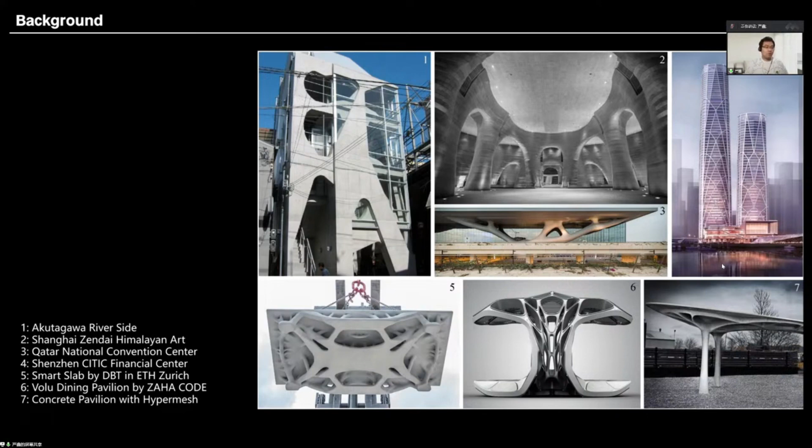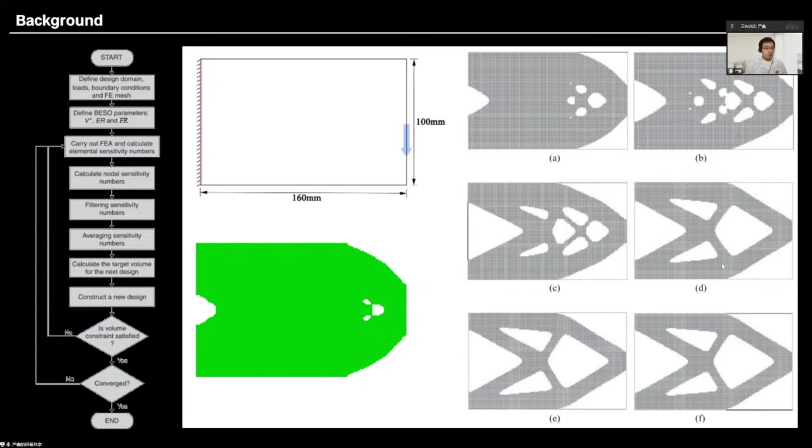But the conventional topology optimization has its own problems. It has limited application conditions in the early stage of architecture concept design, because as designers, when we design our own work, we need to compare our own design objects with the structural performance. This is a very important thing for us, because if we just depend on the computer to tell us which one is good and which one is bad, that's not the work of us.

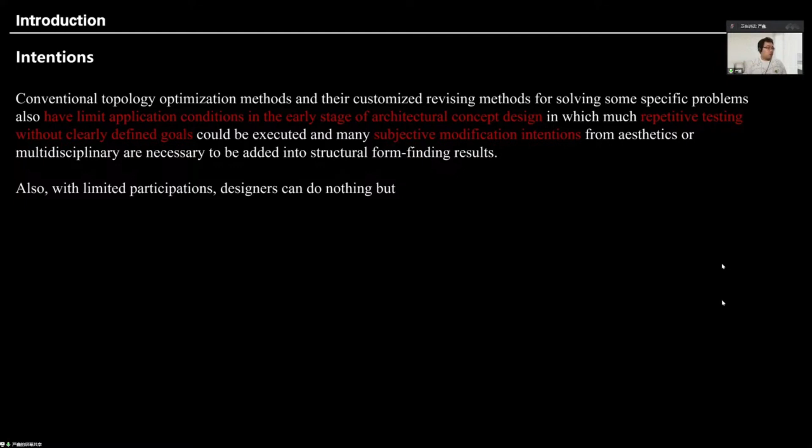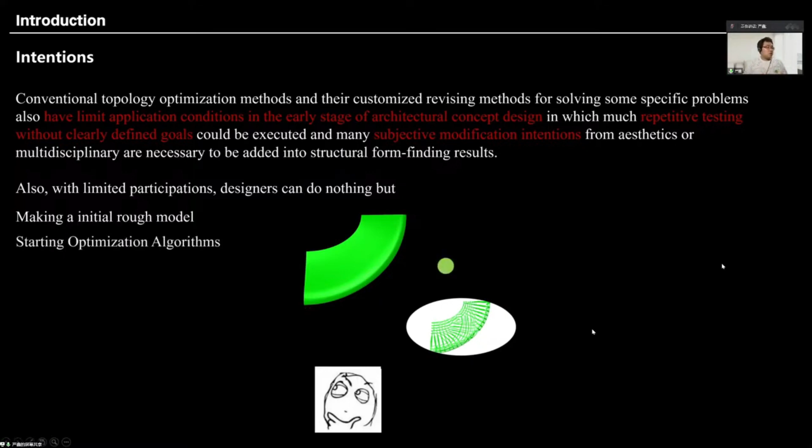So when we use the conventional topology optimization, we usually do something like this: first we make an initial model like the green one, and we imagine what the outcome will be, what the final result will be. We want the final result to be like this, with standard structural components with very small holes over the whole design domain. Then we start the optimization algorithm, and we have nothing to do but wait and wait. Finally, the algorithm finishes its optimization, and we want to get a very good design, but the outcome is like this one.

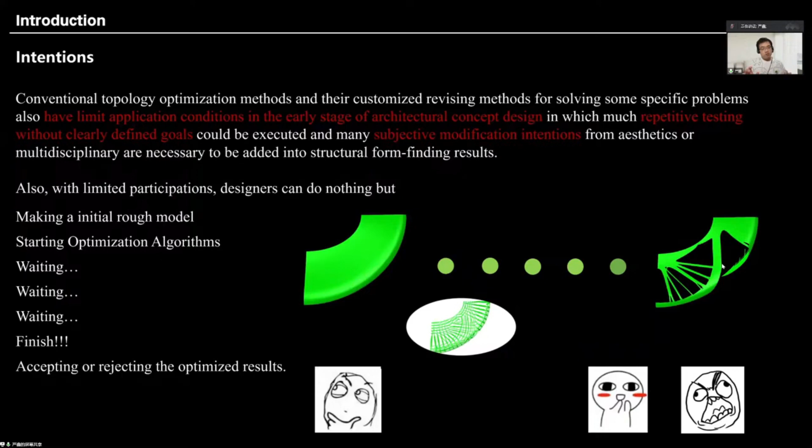We can see the final result the computer gives us is, it's hard to say, the highest structural performance, but it's not what we want. So the question is, can we pre-design the details before optimization, and how to control the design features with topology optimization?

This is the intention of my work, and to achieve these goals, firstly I construct a framework, BESO framework, oriented to architecture design. In the conventional BESO logic, we just write Python code and run it in the Python environment. We have nothing to choose.

In my work I divided the whole logic into several parts. Firstly, we can make a model in Rhino, SketchUp, 3ds Max, or any other 3D software. We use Grasshopper or some scripts to transform the 3D model into TXT files, which contain all the geometric information about the model. We transfer that TXT information into the FEA platform, like Abaqus, and then use Python code to control all the loops and generate TXT files that include the results information. Then we transfer the TXT files back to the Rhino environment.

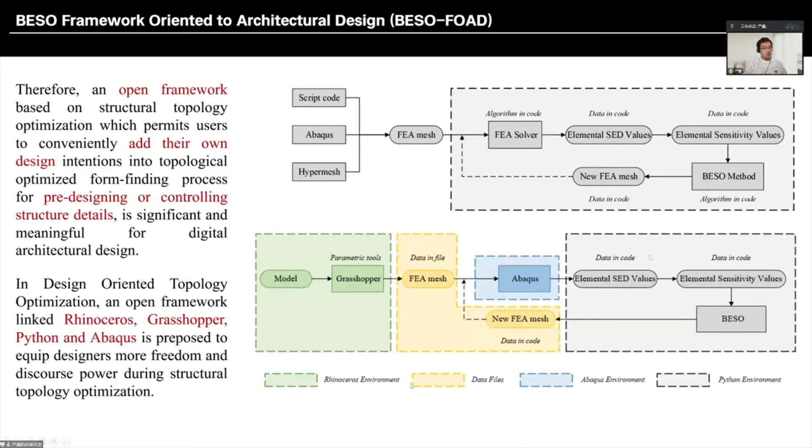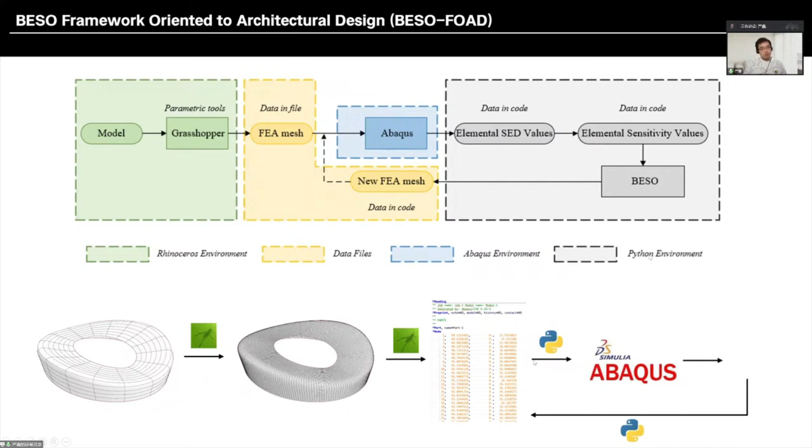Then we can use Grasshopper to generate its calculation network, and get all the information about the FEA elements we need, then transfer that information into TXT files and pass the values into the BESO loop.

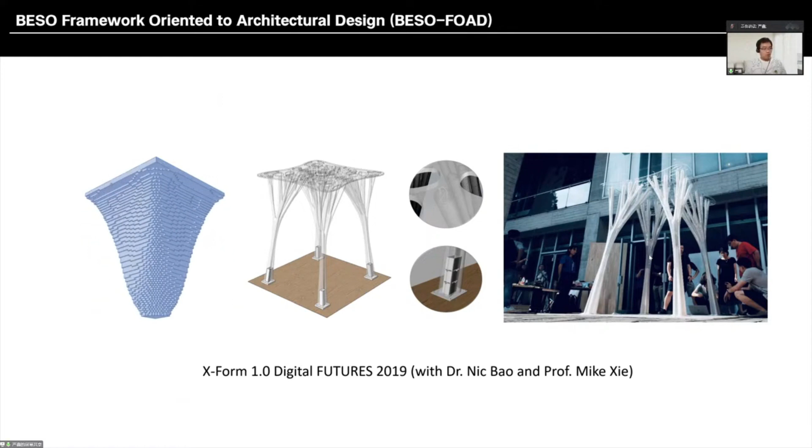With this framework, we designed and fabricated some installations, like XForm 1 with Dr. Nic Bao and Professor Mike Xie, and XForm 2 in 2019 at the Barcelona exhibition, also with Dr. Nic Bao and Professor Mike Xie.

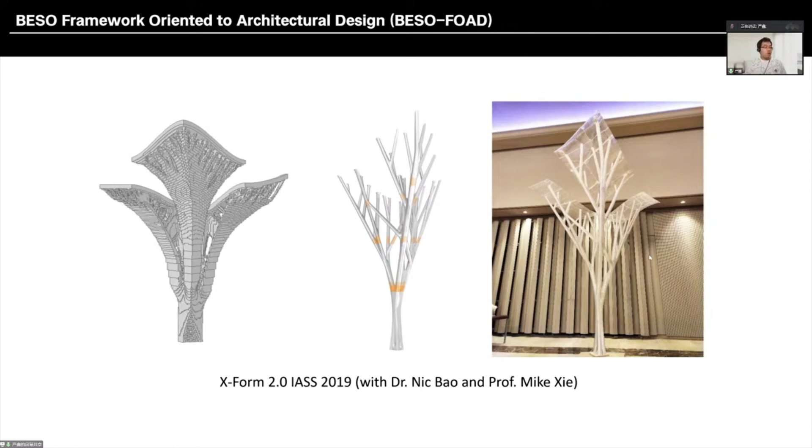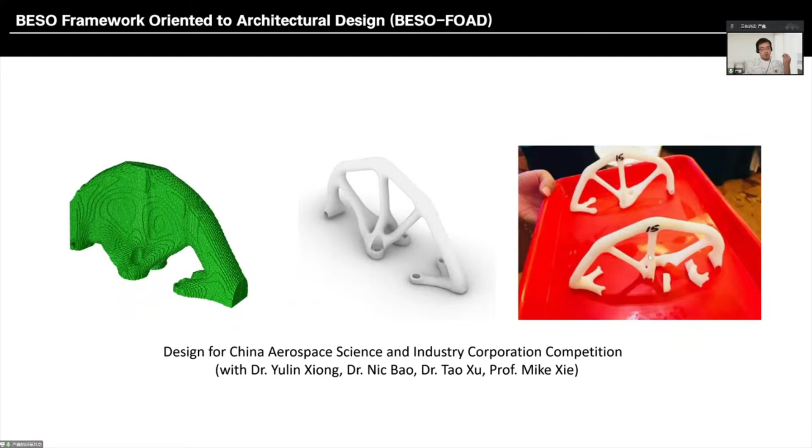We also did some computation, meaning structural computation, to generate the result with the highest structural performance. So this is the basic logic of the framework, but this also doesn't fit our goal of pre-designing form details.

So I changed the framework with a right-hand part, which is artificial coefficient files. This contains some parameters, and with these parameters we can change the basic BESO logic and add our design goals, our design preferences, to the structural optimization.

There are 6 new algorithms I developed in the past two years, and the first one is the original BESO logic.

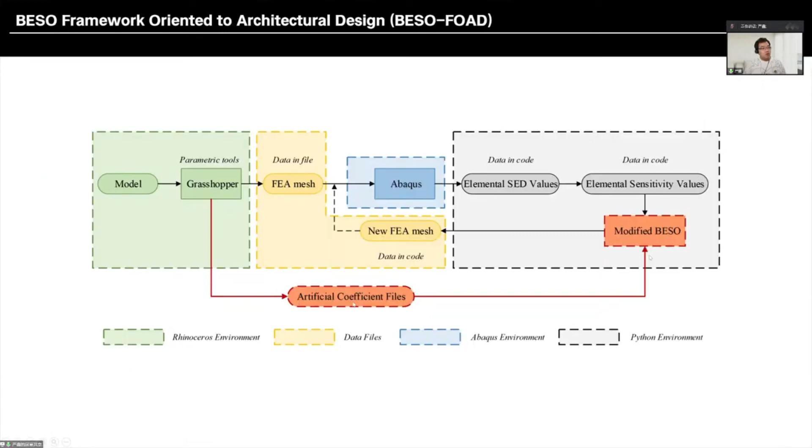You can see the right part is the artificial coefficient files I made. In this algorithm, I add some parameters into the topology optimization algorithm, then integrate our design concepts with the structural calculation and mix them together to get another design, which at some level can fit our design goals.

So the first one is geometric constraint. You can see this is an example of a high-rise building. We fix the bottom boundary and add the wind load at the two sides of this building.

With the original BESO method, we can optimize the structure like this. You can see in the final result there are some asymmetrical parts here and here. So why do we get asymmetrical parts?

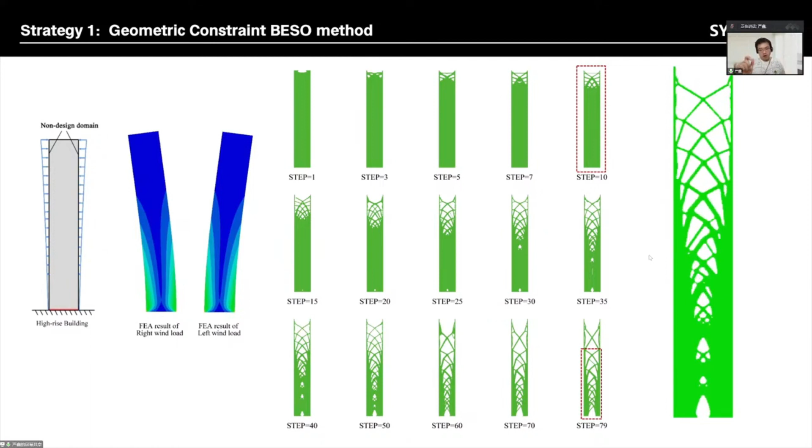The reason is, one, calculation errors in the computer, and more importantly, when we reduce the materials, meaning when we remove elements, the elements in symmetrical positions are not always reduced at the same time. So when one element is reduced and the other one is still there, from that point the following results become asymmetrical.

So I made a SYM BESO, which is a symmetrical modified BESO method. In this method, I couple the symmetrical elements and add their mechanical values together to generate a new value, which is the sensitivity number.

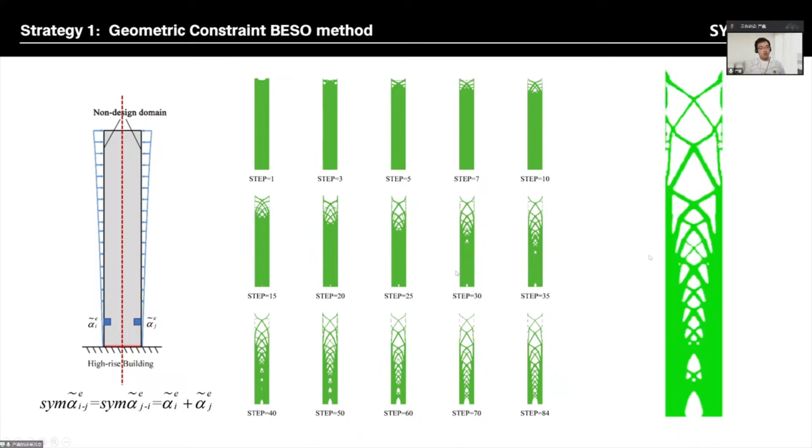Based on the new sensitivity number, I can remove the symmetrical elements together, so in each step we can get a symmetrical result. You can see with this algorithm, we can always generate a symmetrical result.

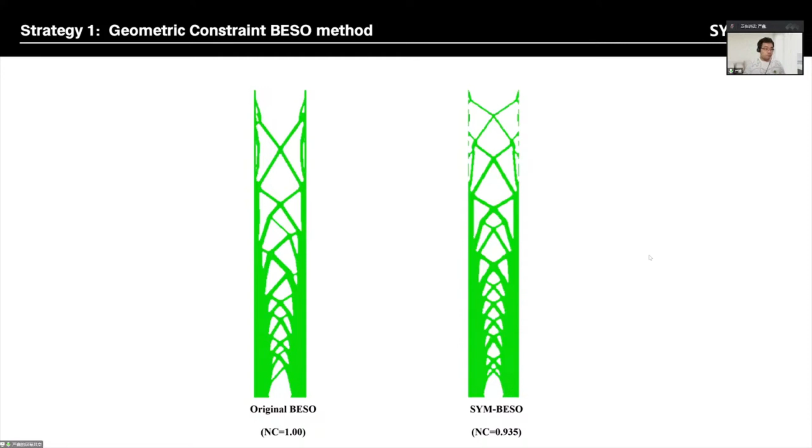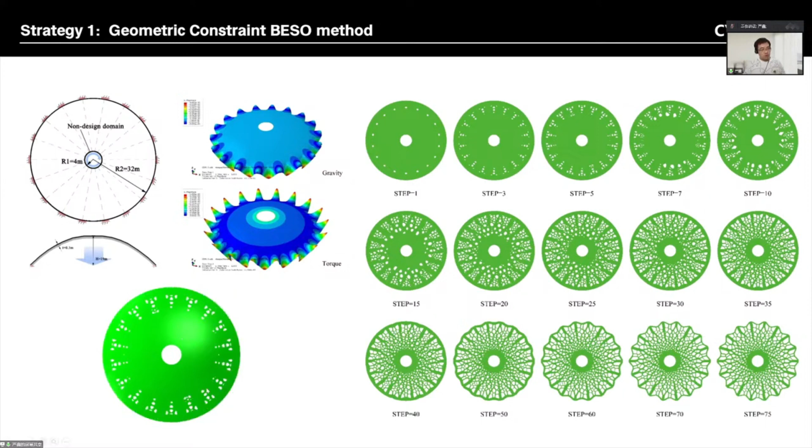The second method follows similar logic. When we optimize a periodic structure with the conventional BESO method, it's hard to generate very regular outcomes because there are so many elements in the periodic parts. We need to calculate all the element values together and then remove or preserve them at the same time.

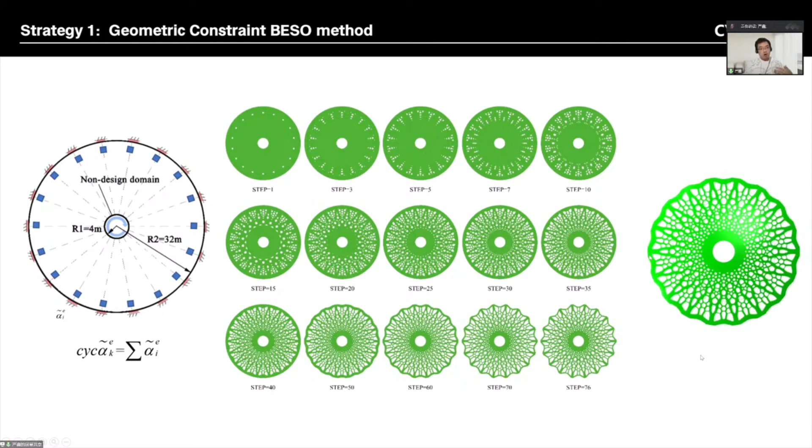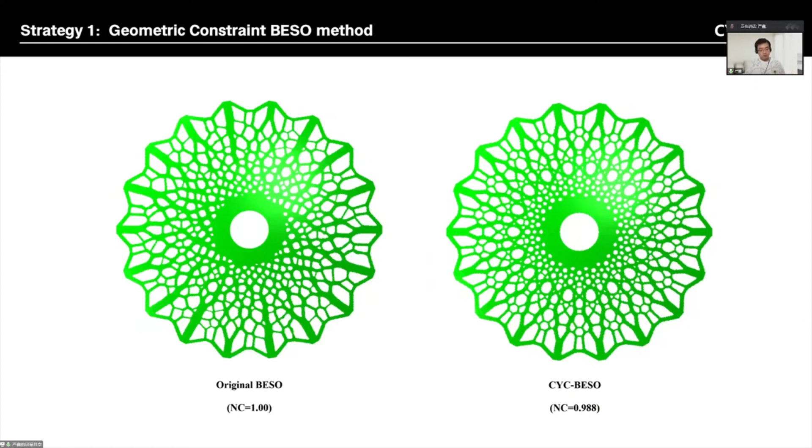In the middle of the evolutionary process, we can generate some small parts which have no supports around them. In the next calculation, this small part will just fall down without any support. If this happens, the FEA calculation will stop because there is a very big displacement.

To solve this problem, we just need to remove the isolated part before the calculation starts. But the question is how we can find the small parts without any supports in the optimization algorithm. So we use the depth first search method to search for the isolated part.

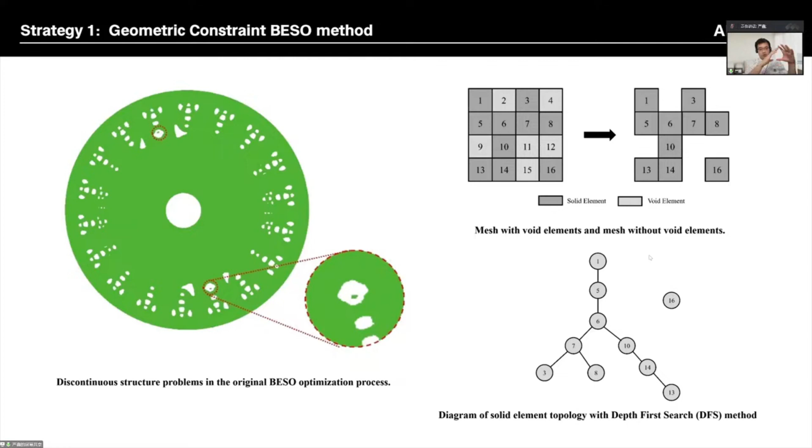With the DFS method, we can select which part is the small, unsupported part and remove it first, then transfer the remaining structure to the next calculation.

The second strategy is pre-design with multi-radius. The multi-radius BESO changes a very important parameter named RMIN in the BESO method. In the conventional BESO method, RMIN is a key parameter to control the local size in the final result.

This value is like the size used to smooth the local mechanical values. With the RMIN value, we can generate a part with a similar size throughout.

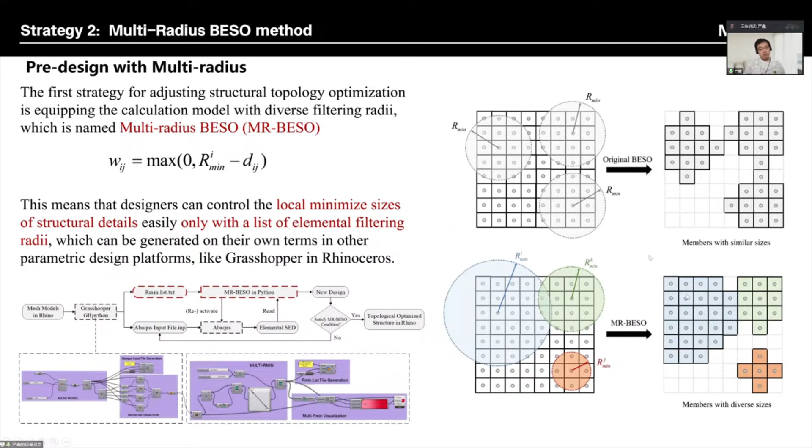If one element is assigned a bigger RMIN value, and another is assigned a smaller RMIN value, then with the MR BESO method we can generate a final structure with very huge blue parts and very small red parts. This way, we can use the RMIN value to pre-design the final features in the optimized result.

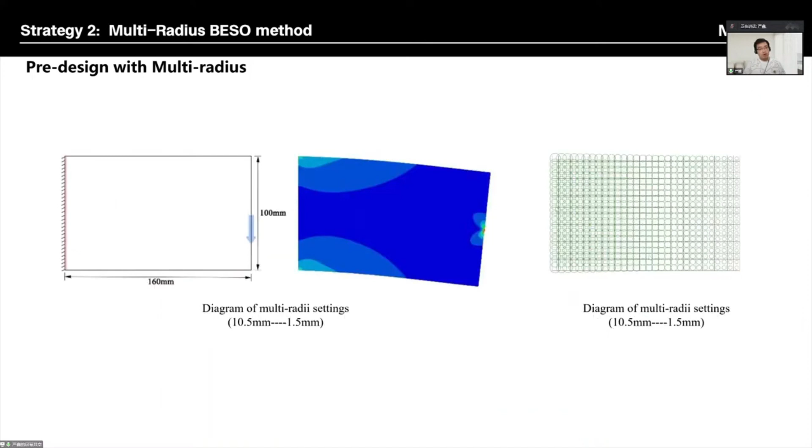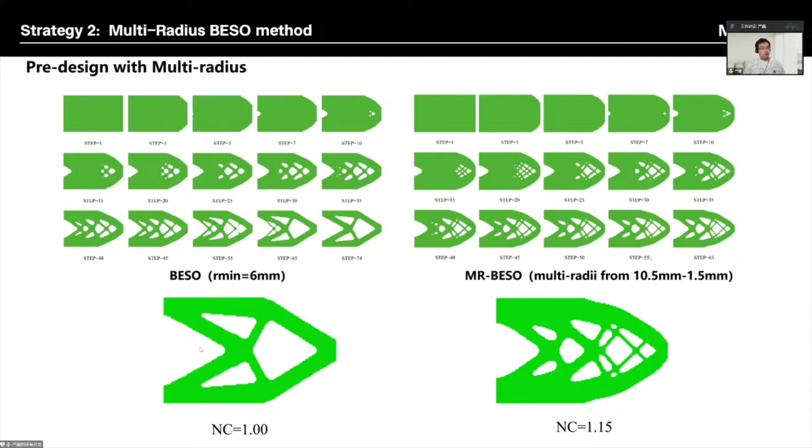With the very big RMIN value on the left, we generate very huge structural components. With the small RMIN value on the right, we generate some slender parts. This is generated by the original BESO method, so you can see the difference.

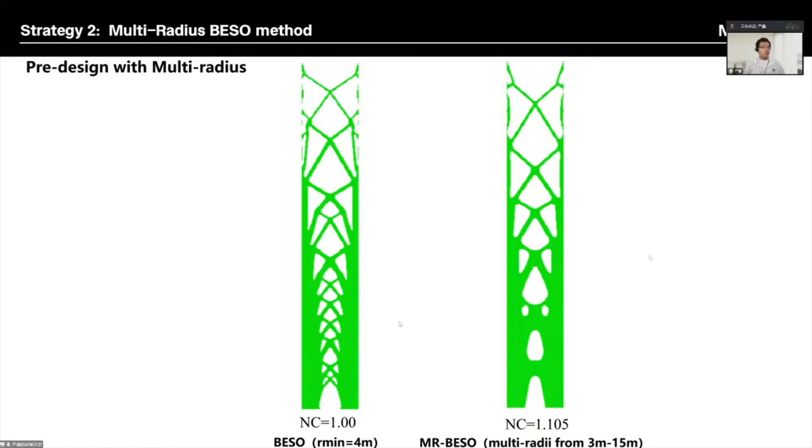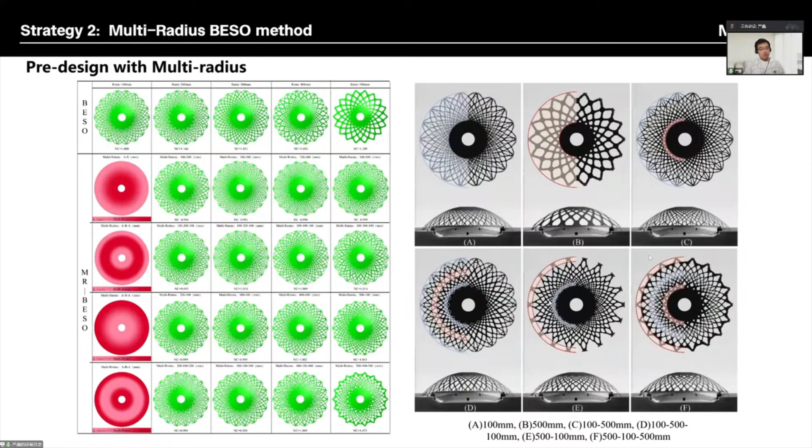And the third strategy is pre-design with a multi-volume.

So in the original BESO method, we have only one volume fraction, which means maybe if you set the volume fraction as 50%, it means you will remove 50% elements away and hold half materials in the final result.

But if you just have the only one volume fraction around the whole design domain, sometimes it will happen like this. So when the original BESO method optimized the whole design domain, there are some parts totally void and some parts totally solid, because maybe the left part is more important for the structural performance, and the right part is not that important. But for the architectural function, maybe sometimes we need some materials near the right part, and we also need to dig some holes near the left parts, like the blue one and red one.

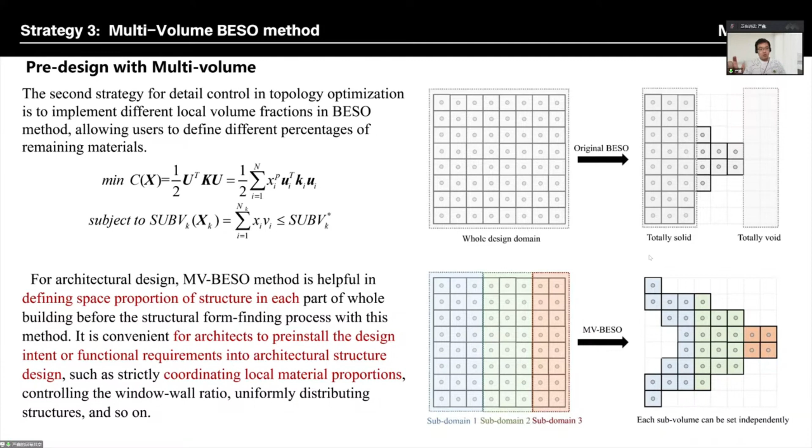So with different subdomain diagrams and different local volume fractions, we can generate a totally different design, and we can control the local materials.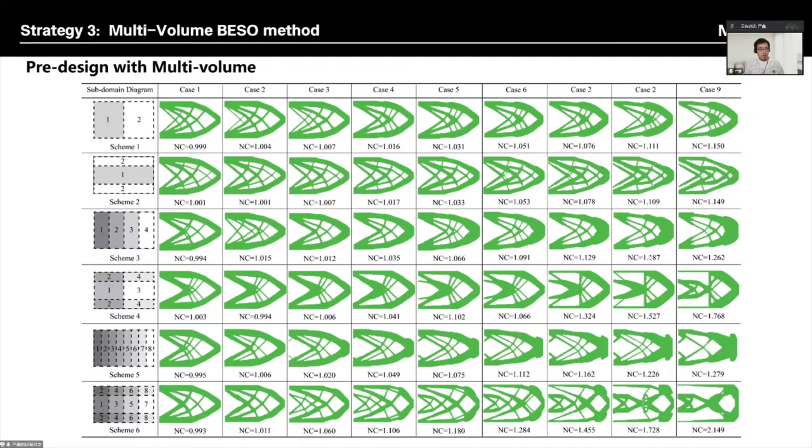In the final result, this method is very important for high-rise building design, because in the original BESO method, we can only have the whole one design domain, and we generate a structure with more materials at the bottom, and very small components on the top.

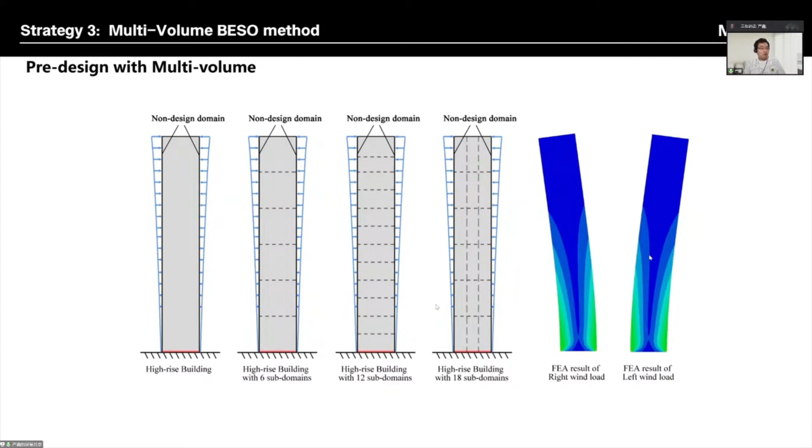So if we divide the whole design domain into several parts, like 6 sub-design domains, or 12, or 18, we can generate different designs. With the sub-design domains, we can calculate their own volume fraction at the same time.

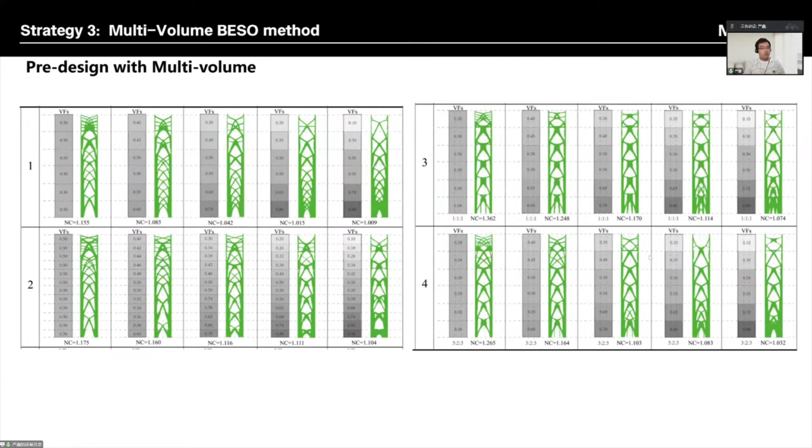So we can dig some holes - this is a very good example to compare the original BESO with the MV-BESO. With the original BESO, we can generate a final result like this one.

But for building design, the bottom part is very expensive - we must dig some holes as doors or windows to let people or light come in. But for structural performance, if you dig some holes at the bottom, it will have a very big effect on the structural performance. So if we divide the whole design domain into 12 levels, we can make some bigger holes and add more windows in the bottom parts.

Also have some more structural materials on the top. That's what we want, because when we design a building, it's not only dependent on structural performance. We also need to compare other requirements - not structural requirements, but think about the aesthetic or function requirements.

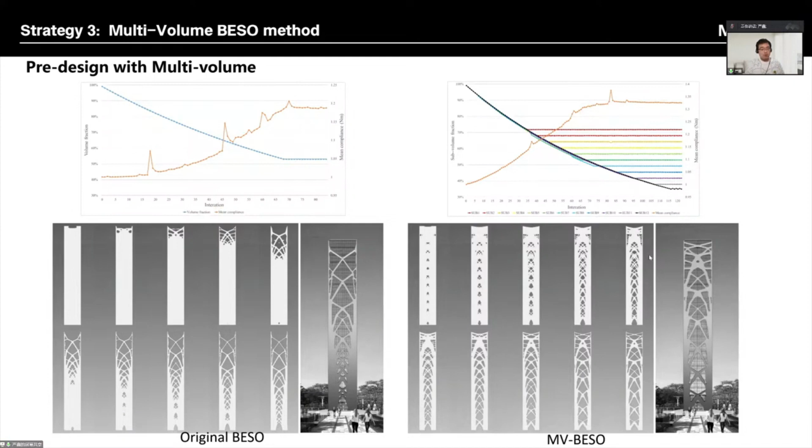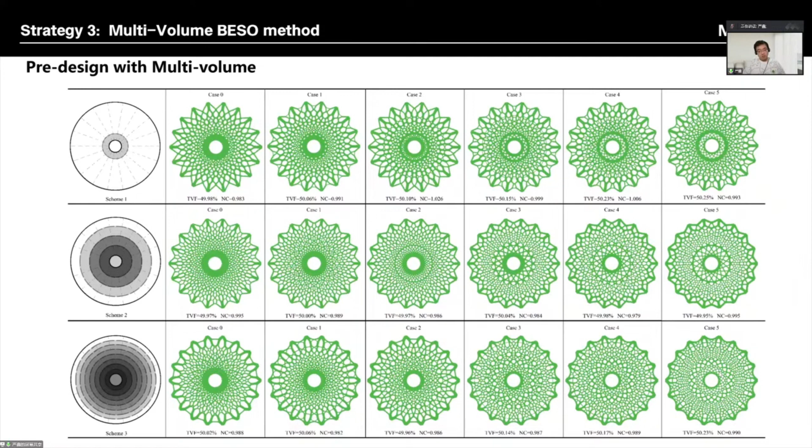We can generate very special shell design domains with the MV-BESO method, because we can draw different patterns on the top and set different local volume fractions for different parts. This lets us pre-design the geometric features of the whole design. If you want big holes in one part, you set a very low volume fraction there, and if you want bigger structures, you add higher local volume fractions.

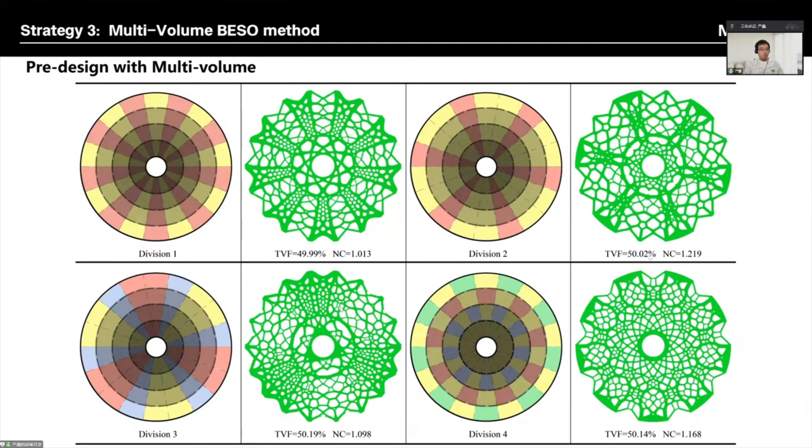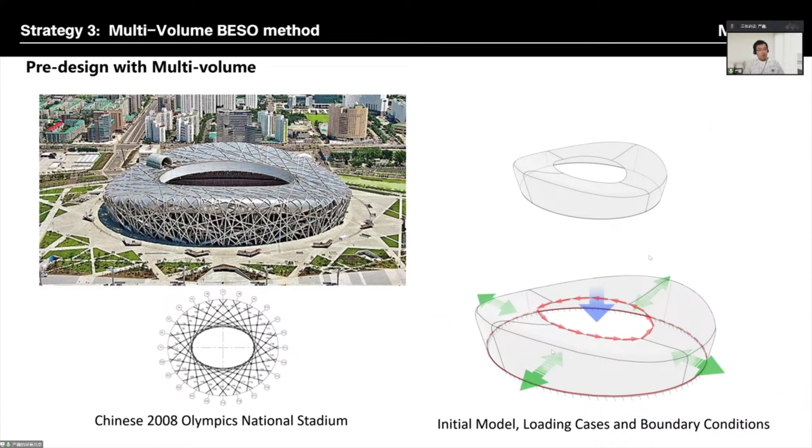This example is about the Olympic National Stadium. When we use the BESO method to generate it, the first one is the example we're familiar with - the original design of the bird nest. Level 2 is the design with the original BESO method. This is the best design from the structural perspective, but not from the architectural perspective, because there's so much material at the two corners and very big holes in the middle, which doesn't look like a bird nest.

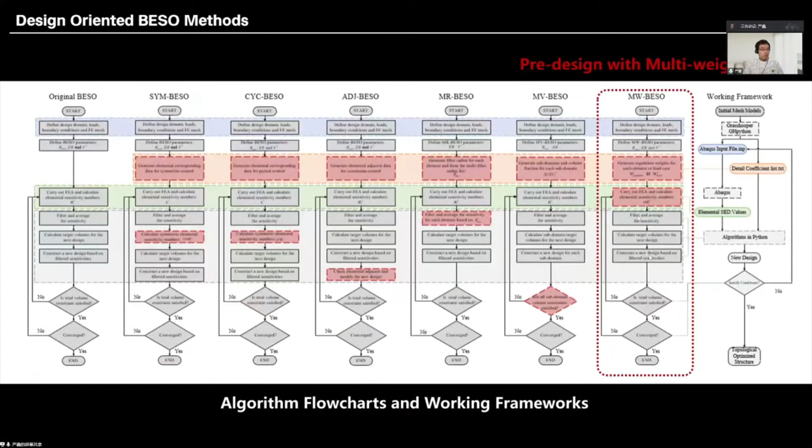If we use the MV-BESO method, we can divide the whole design domain into many parts, like 25 subdomains, 100, and 400. With MV-BESO, we can generate a final result with more slender structural components and more small holes over the whole structure. The last one is pre-designed with multi-weight. In the BESO method, the very important value is the elemental mechanic value after FEA calculation.

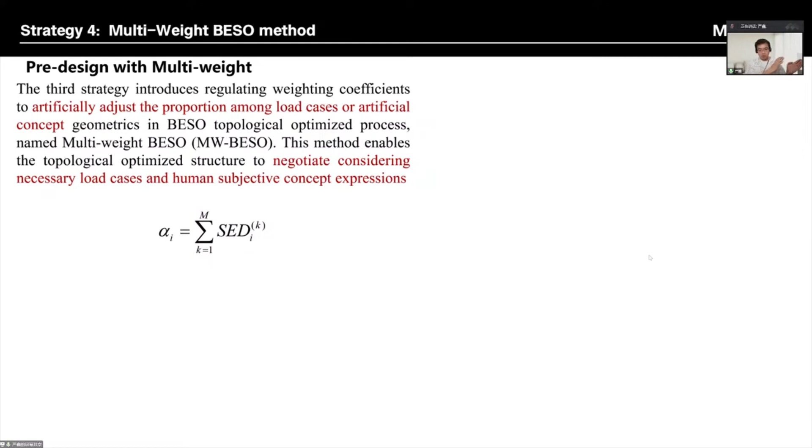This value is the parameter for us to choose which element should be removed and which should be retained. But this value in the original BESO just cares about the loading, the structural performance. If we want to add maybe some drawing or diagram into the algorithm, we can add another value into the calculation of the sensitivity number, like this one.

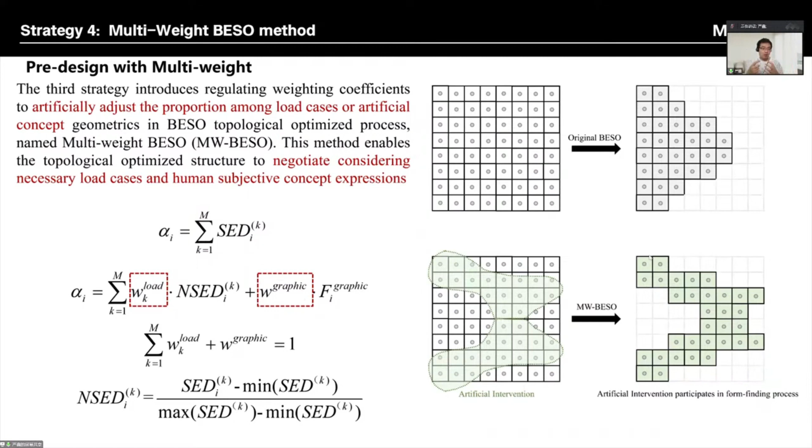This one is about the structural loading, and this one is about the graphic parts - you adjust, add some drawing to it. So MW-BESO can compare these two pieces of information and mix them together to generate different designs.

For this 2D cantilever, if we add a drawing like this - arrows on the left parts - it means the designer just needs a structure near the left parts, but components like this have very limited contribution to the structural performance. So if you add this pattern, you can generate those parts in the final result with MW-BESO.

If you just reduce the weight of the graphic, you can return to the original BESO result. So MW-BESO equips you with choice - you can reduce materials at any time, at any level. If you really must have components here, you add the weight of graphic to a bigger value. If you want to try removing components that are unimportant for structural performance, you just set the weight of graphic to a very small value.

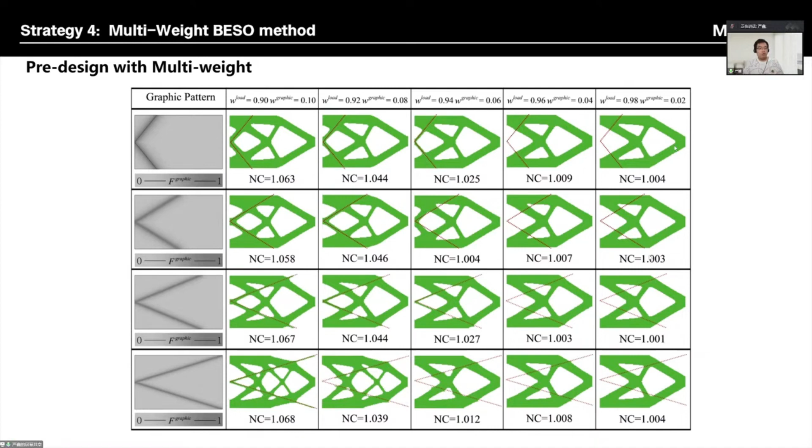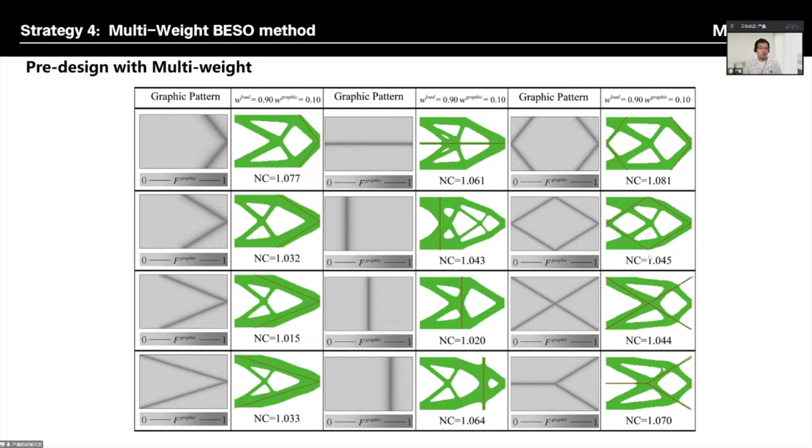With this kind of method, you can add geometric features inside the final result. Also, if you don't want to add graphic patterns, you can use different loading cases. For the dome design, the bottom left one is generated only with gravity loading, and the first one is only with torsion in the center - you can see totally different patterns.

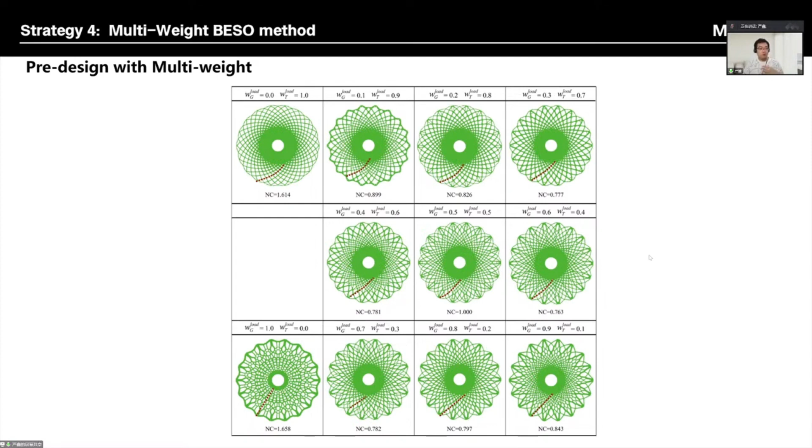For the first one, with torsion in the center, it generates curved parts like the red lines. If you calculate only with gravity, you generate straight components from the boundary to the center. So if you change the weight of gravity or torsion, you can adjust the structural components from curved lines to straight lines.

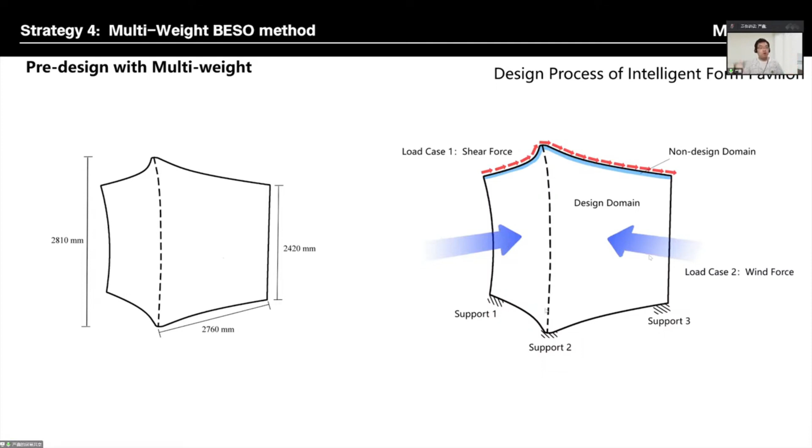This is a real project designed with MW-BESO in 2020 at Shanghai on the Tongji campus. When we designed this installation, we made an initial design domain like this - a concrete wall. We added a first load as shear force on the top, added two wind loads at two different surfaces, and fixed three points.

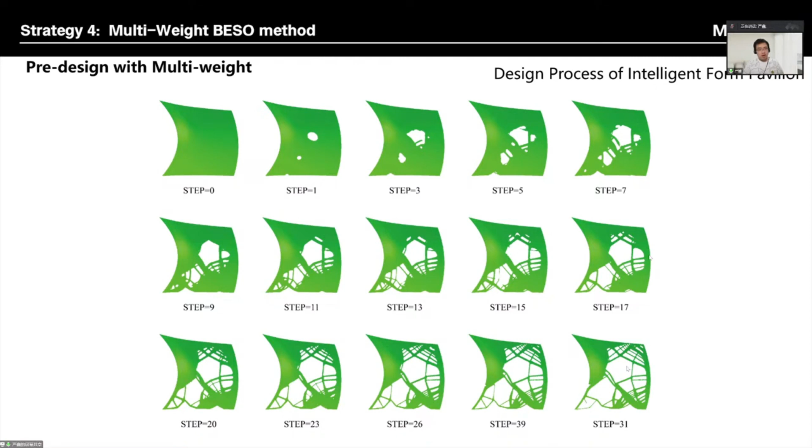When we use the original BESO, we generate the final design like this one. This isn't what we want, because the top parts have no holes, but the middle parts have so many big holes.

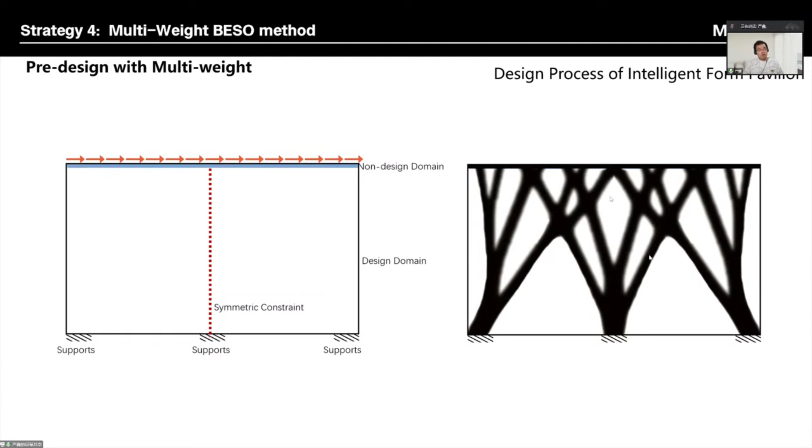So we just use the 2D example to generate a 2D optimized pattern, and then transfer the pattern to the MW BESO and generate the weight parameters, which is the artificial coefficient files to the MW BESO. Then we can compare the three information and mix them together, which means we set the weight of the loading case to 99%, and the artificial intervention pattern with the weight of only 1%.

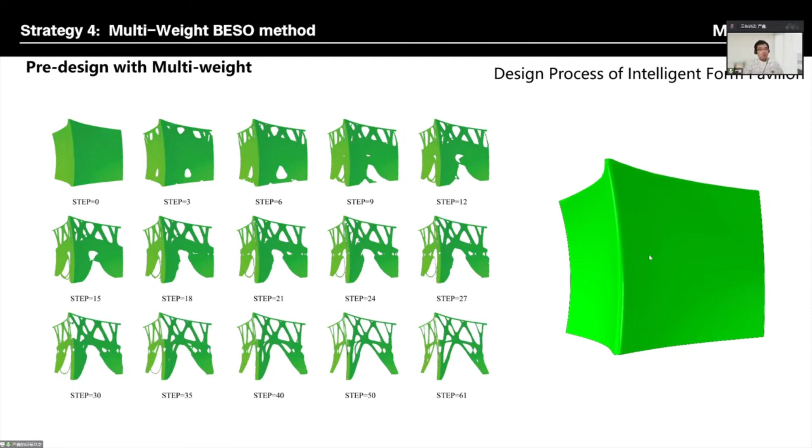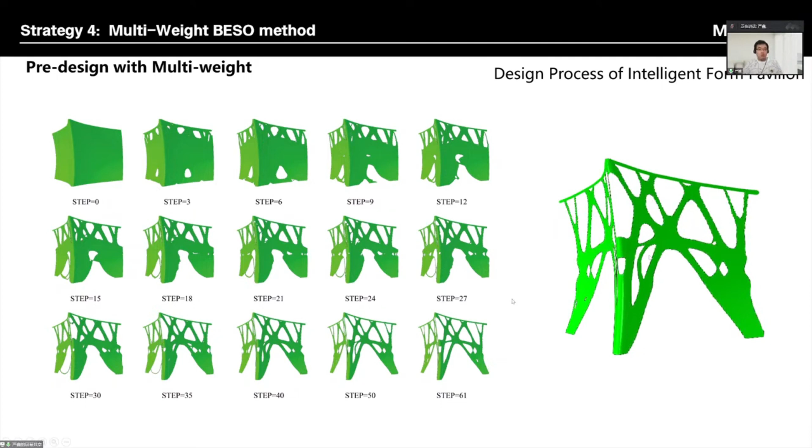But the final result is totally different from the original BESO design. So you can see with this settings and with MW BESO, we can generate a design like this one. It's totally different from the original BESO, right? It's totally different from this one.

So if you compare the MW BESO optimized result with the form or with the patterns we transfer to, you can see the MW BESO adds structure components in the middle to support the whole structure, and encrypts the whole structure with a higher structural performance. So this is the final installation in Tongji Campus.

So that's the work of mine over the past 2 years, and that's all of my today's presentation. Thank you.

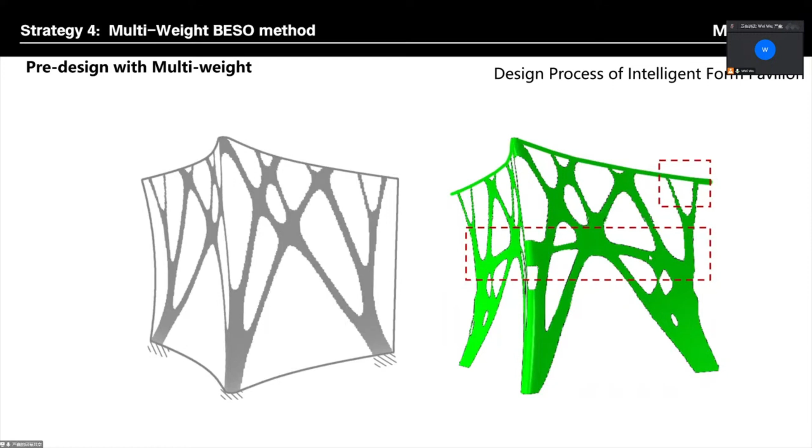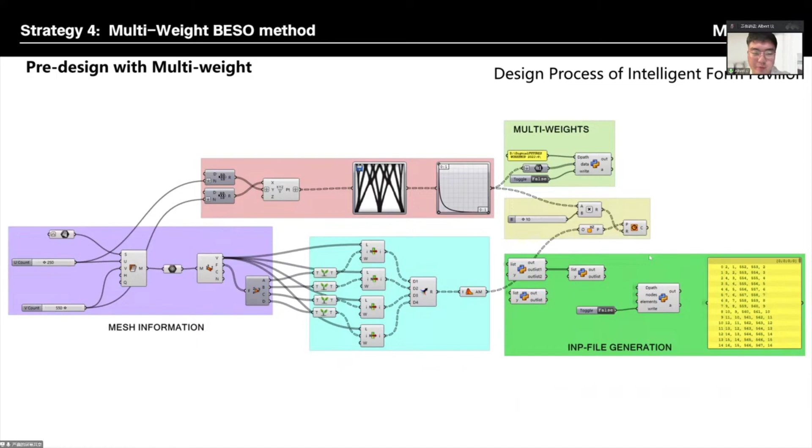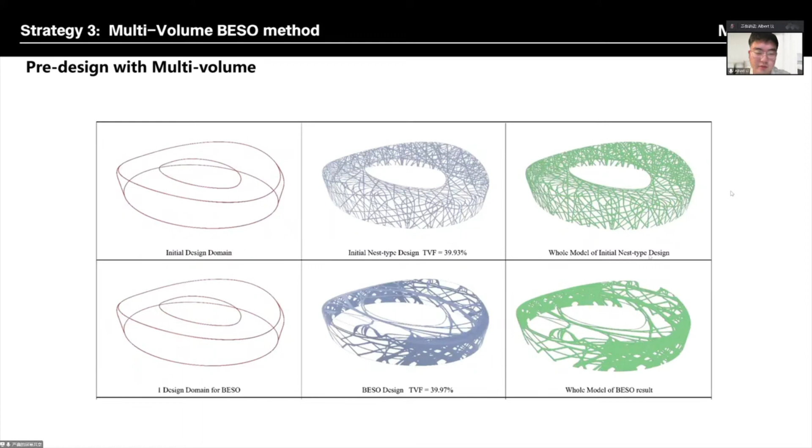Hello, can you hear me? Hello, Dr. Yan, thank you for your amazing presentation. I have a question about the MV BESO in your bird nest example. How's the performance loss when you use different resolution of subdomain?

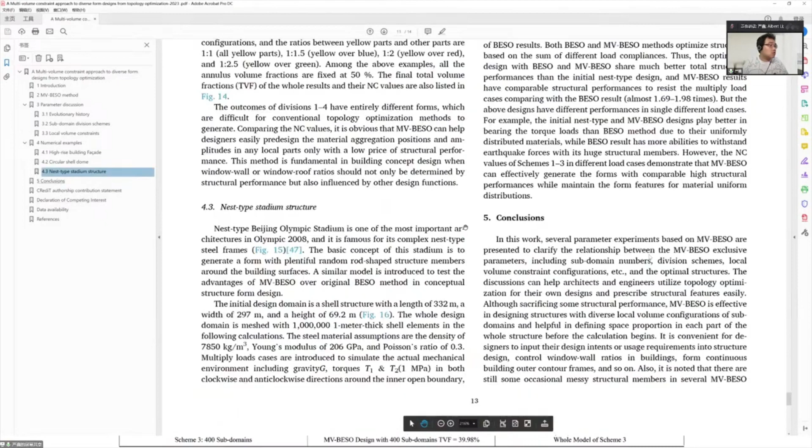In this presentation, I didn't add the information about the value, the structure loads. So let me open my paper, to give the information about the component, the structure loads. So this is the initial design, which is the real project, and this is the BESO result, and this is the 3 designs with 25 sub-design domain, 100 and 400. So with the different loading cases, we compare all the results with the BESO method.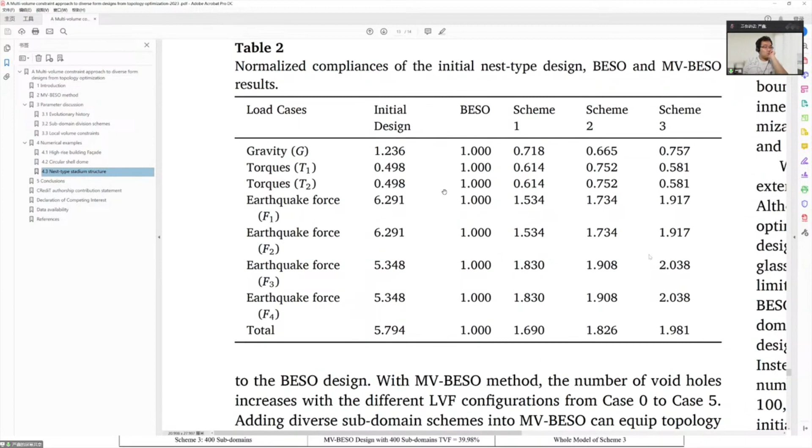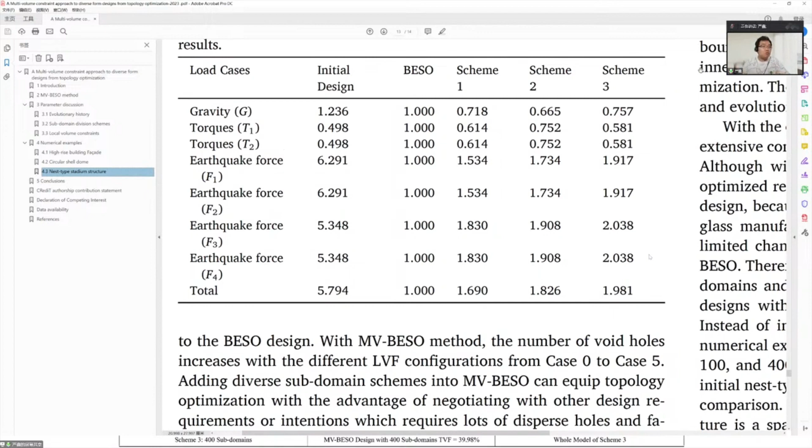So you can see at the earthquake force, maybe the BESO method is the best one. But for the torsion in the center, you can see the MV BESO is the best one, and the initial design is also good. But for the gravity case, MV BESO is also good compared to these two. So I think it depends on what you want to optimize, because in this example I just added all the loading cases together to reduce the materials. So I think the MV BESO can generate the structure with small holes, which is much better for the torsion in the center.

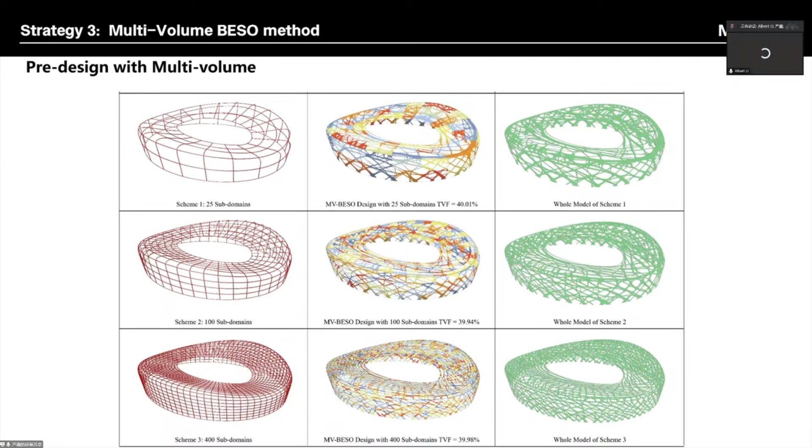Okay, understand, thank you for your answer. And I have another question - when you developed this algorithm, I remember you used Python. But when I use Python, I noticed that only float numbers are allowed, not double. But when we use the BESO method, we have a design variable, and we need a very small design exponent, I remember that. How do you use Python to support this very small number, because it may exceed the limitation of float number?

Actually, I haven't encountered the problem about the float limitation. Okay, we can discuss later. But I think maybe you can try to identify the float number and then calculate back to the result. In the middle process, you can amplify the float number if it's too small, generate it, calculate it, and then go back to the real value - I mean divide the value. Okay, I think this is a question about numerical accuracy, but okay, I understand, we can discuss later.